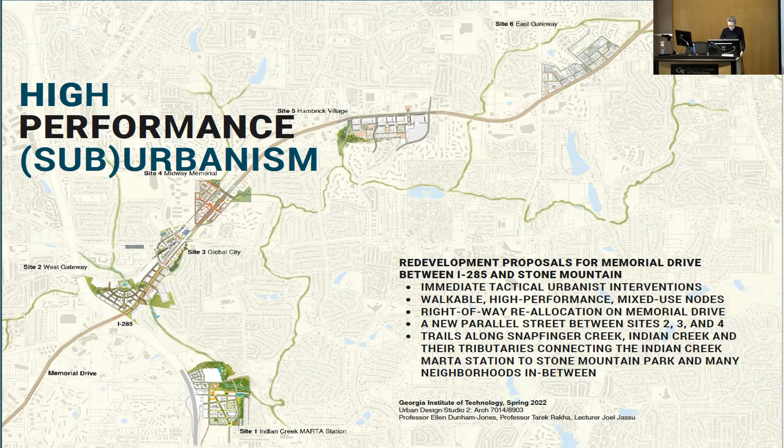To further increase connectivity across the arterial, this team put Memorial Drive on a road diet. They calculated that the average daily traffic count could in fact be handled by 4 lanes instead of 6. They reduced the posted speed and provided more generous tree-lined sidewalks, and put a park in the median that serves both for bus stops and as a safe haven for those crossing the road.

They also, a little more imaginatively, proposed an eco bridge over Memorial Drive between two creekside parks to allow animals and people to cross safely, and also to be a visual cue to drivers to slow down.

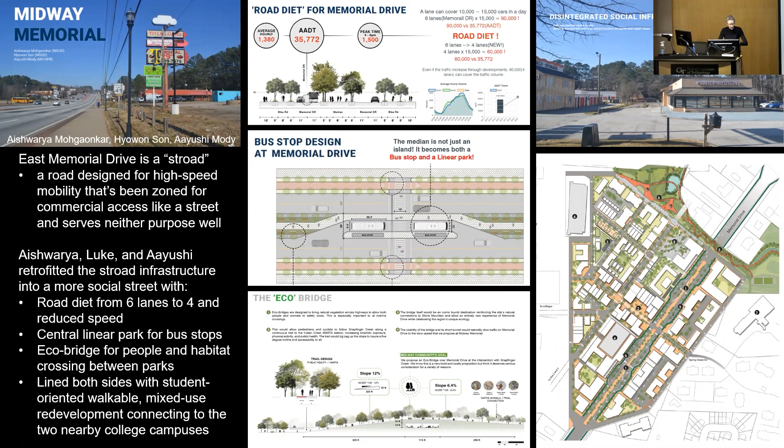The safety implications of some of that design were mostly about the social interconnections, but they lead to the next challenge: improve public health. Suburban living has significant health risks, many of which are due to cars. Car crashes are the leading cause of teenage deaths in suburbia, period, actually. The sedentary lifestyles that cars engender lead to higher rates of obesity, diabetes, and heart disease. Suicide rates are higher in suburbs than in cities, and often correlate with the loneliness epidemic and the isolation that is a direct result of how suburbs are designed.

Again, there are lots of strategies shown in blue here that we can and should be doing. I'm going to show another one of the Memorial Drive projects, this one focused on access to healthy food.

This was located at the Indian Creek MARTA station. It's an underused 30-acre park and ride at the end of the east-west MARTA line. It has bus access off of I-285, but is otherwise completely disconnected from the neighborhoods around it.

In addition to proposing trail and street connections, this team proposed accommodating the park and ride spaces in parking garages along the highway, and then on top of the old parking lots, building a transit, food, and trail-oriented development.

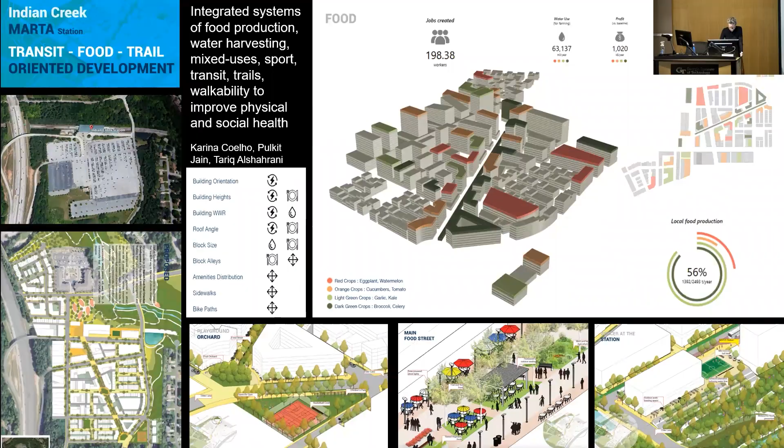Now, suburbia in general always invested more in making a beloved private realm than in investing in great public gathering spaces and social infrastructures. Yet it's exactly public spaces and social infrastructures that are needed as a result of the ethnic diversification and the increasing isolation brought on by COVID.

This is particularly true of East Memorial Drive, although designed as the route that connects the Georgia state capitol to the largest Confederate memorial in the world. That's why it's called Memorial Drive, a nice Jim Crow contribution. The population along it now is mostly African American, with a high number of immigrants from East and West Africa and the Caribbean.

In this team's proposal, they analyzed the existing social infrastructure, preserved it, and laid out their redevelopment to knit them together. Their new Main Street connects an existing park, a memorial, and health center to new shops, apartments, and a movie theater. The theater is at the entrance to new movie studios that the owner of the site told us he wants to build.

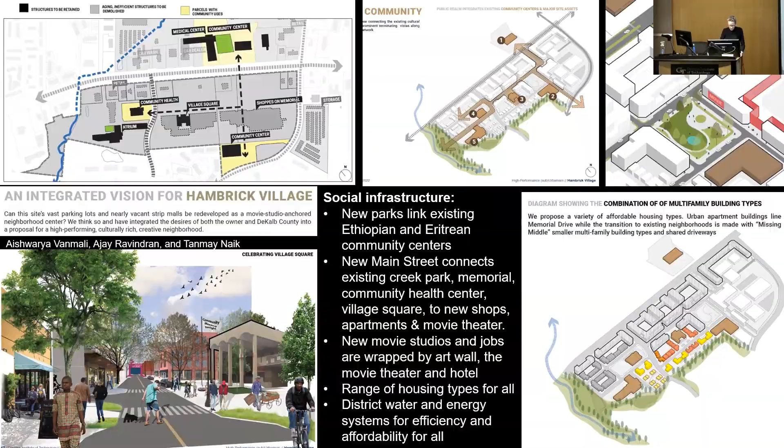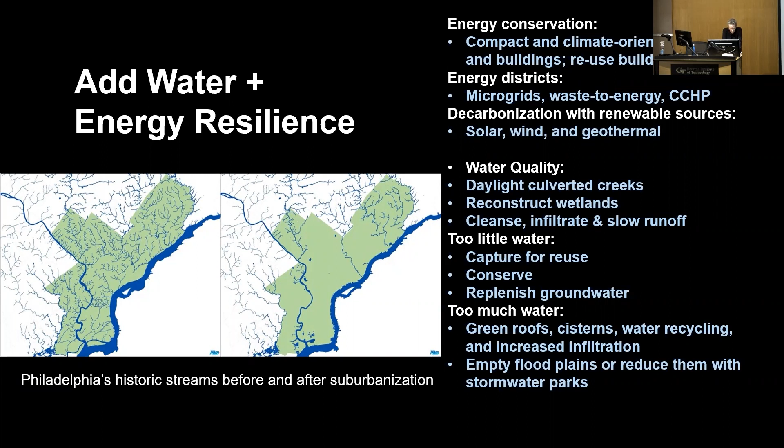Climate change and the need to add water and energy resilience is obviously an enormous challenge. No one was thinking about sustainability when we built the suburbs and the energy and water-heavy lifestyles that they now require. By having high-performance buildings and urban design students co-teaming, all of the teams in these studios thought a lot about environmental performance.

In this one, the large dead strip mall's proximity to the flood-prone junction of two creeks led them to redesign that junction as a stormwater park and make it the focal point of their new development instead of the neglected back. As such, it provides both needed social infrastructure and has the capacity to contain floodwaters as climate change storms' severity increases over time.

On the energy side, while the designers initially thought it made sense to place tall office buildings facing the highway, their high-performance building students' energy models showed that such a west-facing location would increase energy use from air conditioning substantially. The final scheme modified the heights, placement, and orientation of tall buildings accordingly.

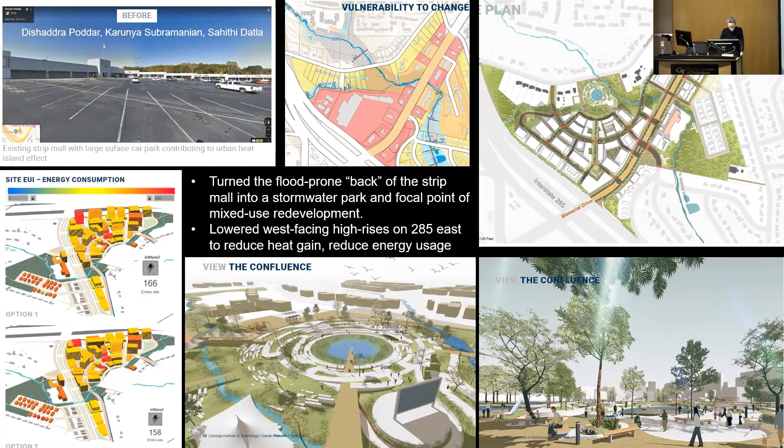In 2021, the studio that we did collaborating with the county also focused on adapting to climate change, but this time the sites were two large dying shopping malls, the North DeKalb Mall and the gallery at South DeKalb, which is still usually referred to as the South DeKalb Mall. Both malls flattened their sites and drained their runoff directly into the creeks behind them, severely diminishing their water quality.

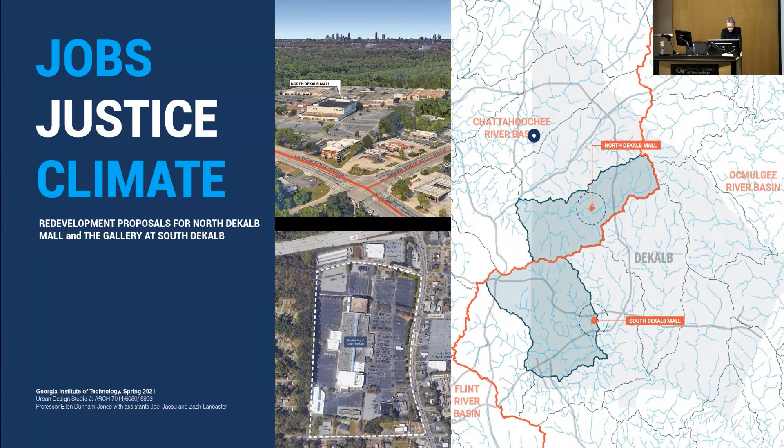This team solved that problem by creating a stormwater park, or a series of them, by discovering that the mall had been built on top of a former creek. They proposed restoring the original hydrology and daylighting the creek in a series of central parks where water would be slowed and cleansed before entering the creek below.

This team also proposed repurposing the concrete department stores, preserving their embodied carbon, and topping them with the sports fields that the local high school told us that they need.

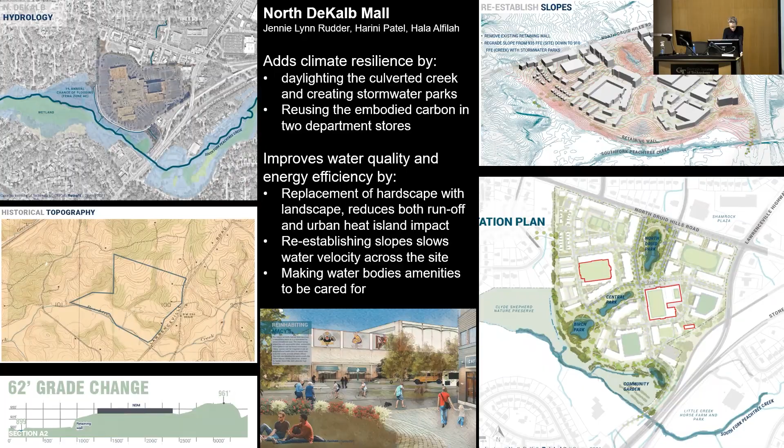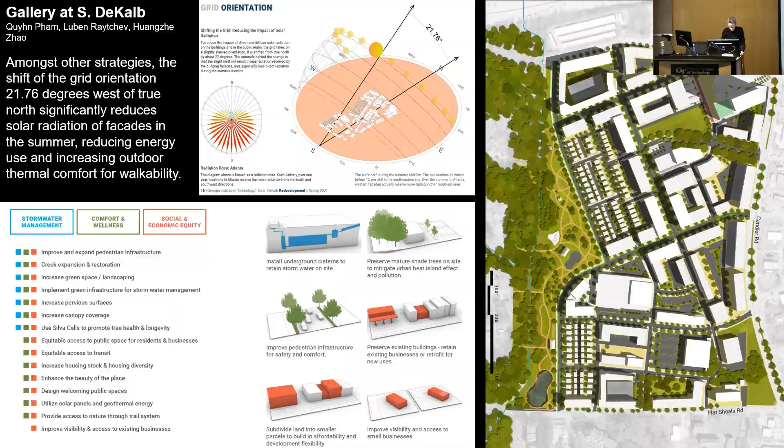Now, it may surprise you, but 80 to 85% of jobs in the US are more than 5 miles from the central business district, and they take a very low-rise, auto-oriented suburban form.

The pandemic and work from home have introduced great uncertainty into the office market, but the suburbs have leveraged their proximity to workers to actually begin attracting office workers back by introducing urban amenities into office parks and commercial places that folks are no longer, as many of them, accessing downtown.

At the same time, the labor shortage caused by the retiring baby boomers isn't going away anytime soon. And there's continued high growth in entrepreneurial startups, incubators, and small businesses, especially in the cheaper suburbs than in the expensive downtowns.

This team, working on the South DeKalb Mall, found that most residents near the mall were commuting very long distances to job centers. So the team employed a variety of strategies to revitalize employment at the former mall.

They repurposed the Macy's with healthcare and urban ag, put an incubator for small businesses into two other retained portions of the mall. At the same time, as they were making it mixed use and putting in a lot of housing, much of it was live-work units. And they integrated childcare into the MARTA bus hub that MARTA has proposed at the site.

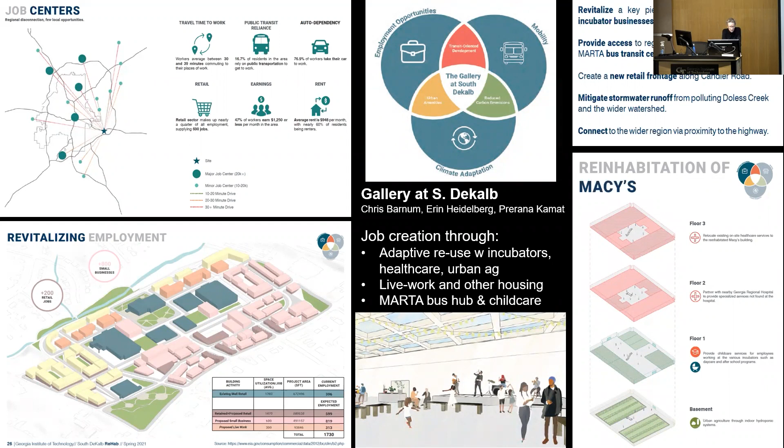Last challenge: support an aging population. Most of the baby boom generation, who the post-war suburbs were designed for, continue to live in the suburbs, even though it's a lousy habitat to try to age independently in once you shouldn't be driving.

In 2019, 1 in 8 people in Metro Atlanta were over 65. In 2030, 1 in 5 will be.

So one of the best ways to support an aging population is with walkable neighborhood infrastructure that is designed to be car light and even car-free. That's the goal of this semester's studio for the area, including and surrounding the DeKalb Farmers Market.

We're partnering with Via, an on-demand van taxi service, with MARTA, who is interested in proposals for workforce housing at their rail yard and bus depot there, and with community leaders. To help us unlock the greatly expanded social opportunities provided by car-free urbanism, we're looking at Barcelona's superblock system and Culdesac Tempe's skinny missing middle courtyards.

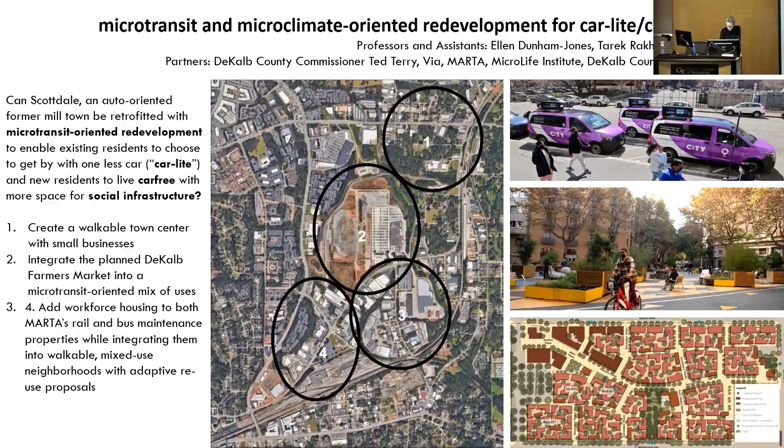So, last slide. I hope I've convinced you that we don't need to tear down any more trees and sprawl outwards ever again. We have plenty of underused parking lots and aging buildings to retrofit with much more social infrastructure.

Yes, there's resistance to change out there, but it can and is being done when great design is accompanied by policy changes. And that's why community leaders like Commissioner Ted Terry are so important.